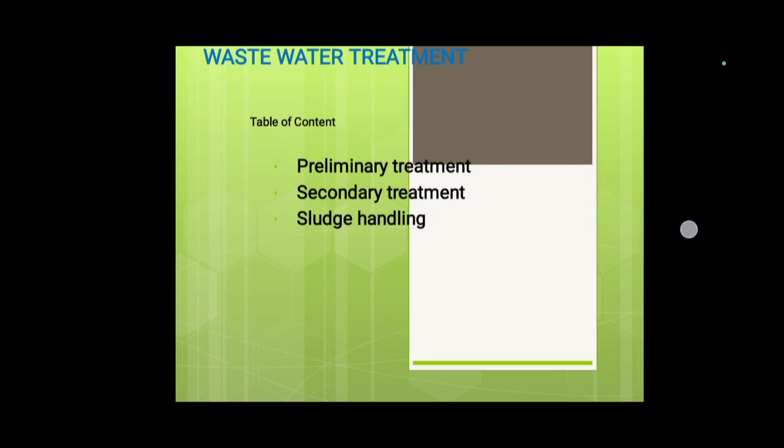First of all, I'm going to discuss preliminary treatment of water. The purpose of preliminary treatment is to protect plant equipment by removing those materials that could cause clogs, jams, or excessive wear to plant machineries. Removal of various materials at the beginning of the treatment process saves valuable space within the treatment plant.

Preliminary treatment processes may include screening method, shredding method, grit removal, pre-aeration, chemical addition, flow measurement, and flow equalization. In the preliminary treatment, first of all, we'll do the screening method. Now in the screening method, floating impurities from the water can be removed. After screening, we send the water for further process.

In the further process, we allow the water undisturbed to remove the small particles, solid particles from the water with the help of force of gravity. That process is known as sedimentation process. For the faster sedimentation, we add some of the chemicals that are known as coagulating agents like aluminum sulfate and sodium aluminate to make faster sedimentation process. In the complete process, flow measurement and the flow equalization is very much necessary.

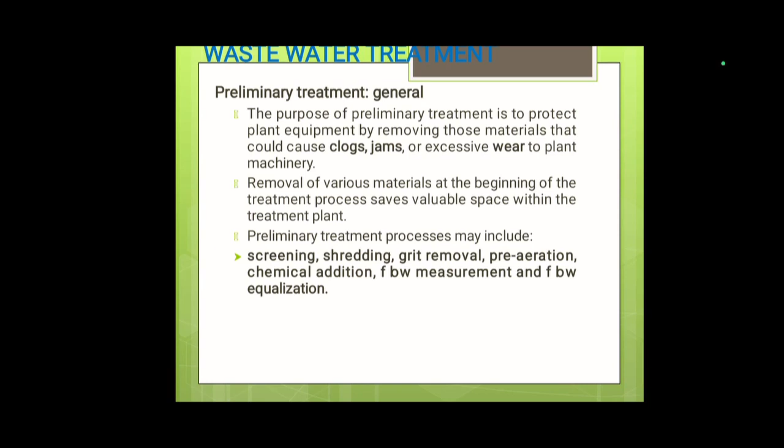In primary sedimentation, wastewater enters in a settling tank or a basin. Solids that are heavier than water settle to the bottom, while solids that are lighter than water float on the top. Settled solids are removed as sludge and floating solids are removed as a scum. The complete solid materials are distributed at the bottom and from the top.

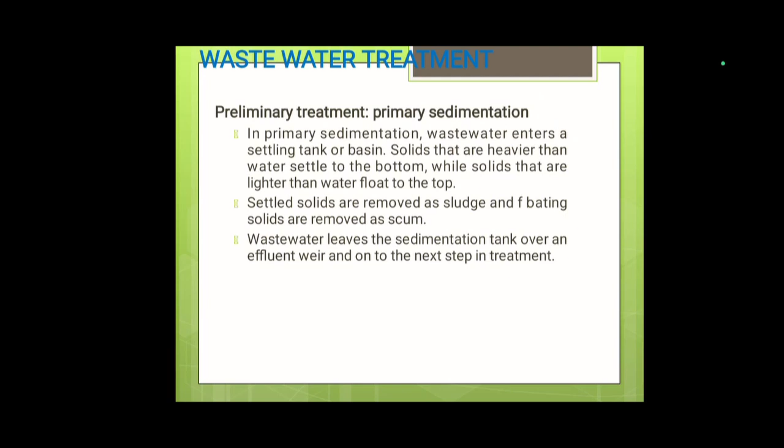The solids which are lighter than water float on the surface of water. So as a scum we can remove them, and rest of the solid materials settled at the bottom due to force of gravity can be removed as a sludge. Wastewater leaves the sedimentation tank over an effluent weir and on to the next step in the treatment. Once sedimentation is done, the water is sent for the next step for the primary treatment. In this sedimentation process, most of the solid impurities and visible impurities are removed.

Clarifiers used may be rectangular or circular. In rectangular clarifier, wastewater flows from one end to other and settled sludge is moved to hopper at one end, either by flights set on parallel chains or by single bottom scraper on the travelling bridge. Floating material, mostly grease and oil, is collected by surface skimmer. In circular tanks, the wastewater usually enters at the middle and flows outward. Settled sludge is pushed to a hopper in the middle of the tank bottom and surface skimmer removes floating material.

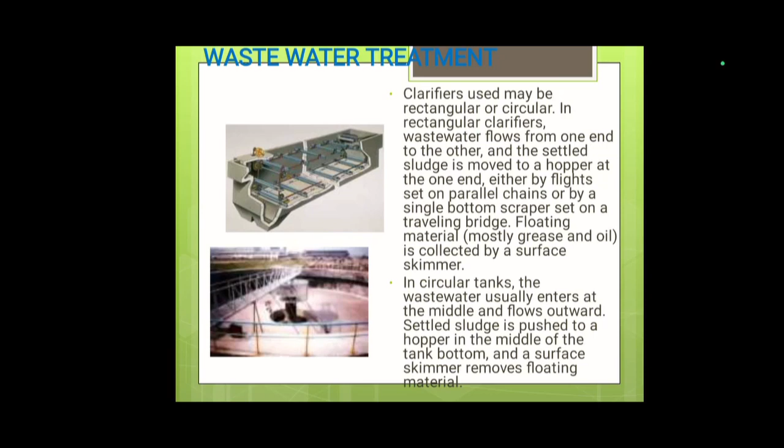As we can see both the diagrams for the circular clarifiers and the rectangular clarifiers. In both the processes, we can remove the solid impurity as floating solid impurities and settled solid impurities. Floating solid impurities, as we have already discussed, are known as scum, and the settled down solid impurities are known as sludge, that is removed from the bottom of the clarifiers. So there are some different types of clarifiers that can be used, as you can see in the diagram. Different types of clarifier are distinguished by the wastewater flow direction and evacuating sludge system. So there are rectangular and circular clarifiers as we can see in the diagram.

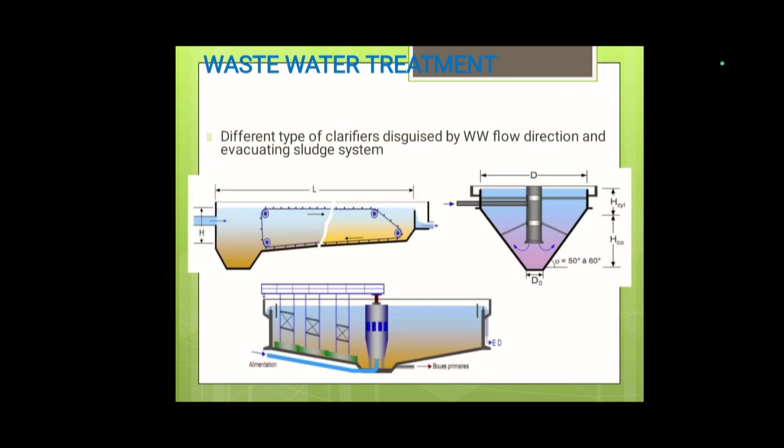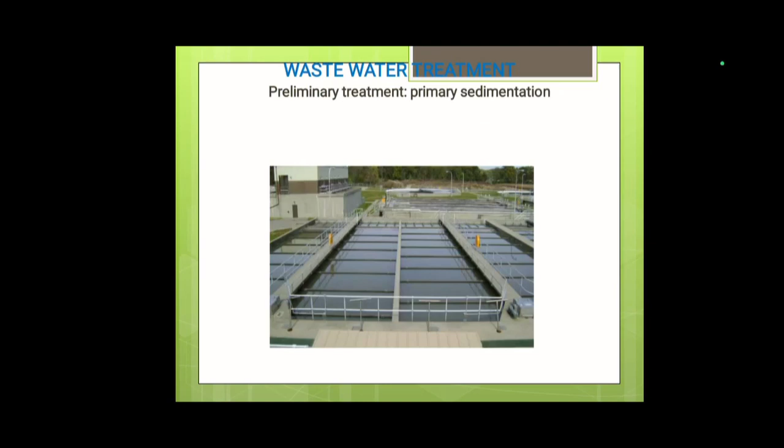Now this is a sedimentation process. As we can clearly see, the water is kept undisturbed in a tank so that whatever solid impurities present inside the water are allowed to settle down with the force of gravity. Here all solid impurities are allowed to settle down and gradually supernatant water is removed with the help of pipes. This is known as primary sedimentation process.

After primary treatment, we treat the water in the secondary treatment process. The main purpose of secondary treatment is to provide BOD removal beyond that achievable by primary treatment. There are some impurities which cannot be removed with the help of primary treatment, so we have to treat the water with the secondary process. Here, the treatment is to provide biological oxygen demand removal beyond what is achieved by the primary treatment.

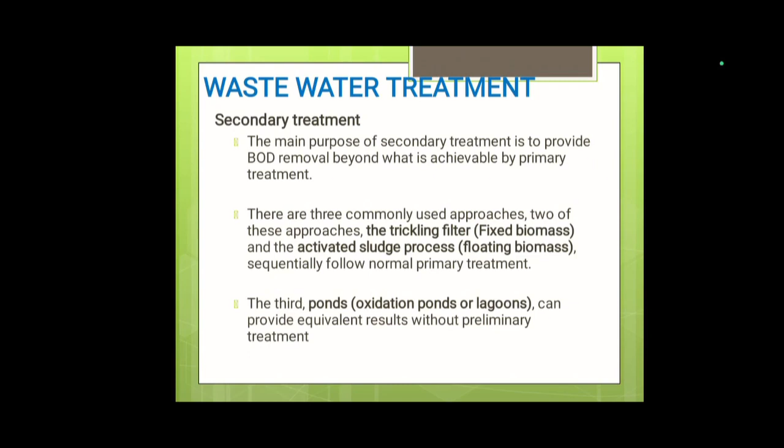There are three commonly used approaches. Two of these approaches, the trickling filters, which is also known as fixed biomass, where we fix the biomass inside the tank, and the activated sludge process, which is also known as floating biomass, sequentially follow normal primary treatment. The third process, known as pond process, also known as oxidation ponds or lagoons, can provide equivalent results without the preliminary treatment. So let us discuss these secondary treatments. We are going to discuss fixed biomass process and activated sludge process in the secondary treatment.

Here we are going to discuss the trickling filters. Trickling filters are tanks filled with solid media. The solid media are plastics or stones, over which the wastewater is trickled. A biofilm grows on media and metabolizes the organics in the wastewater using natural or forced draft. The organics which are present inside the water must be metabolized with the help of biofilm. So these filters allow all these organics present in wastewater to metabolize. In other words, this biofilm provides a platform to metabolize the organics in the wastewater.

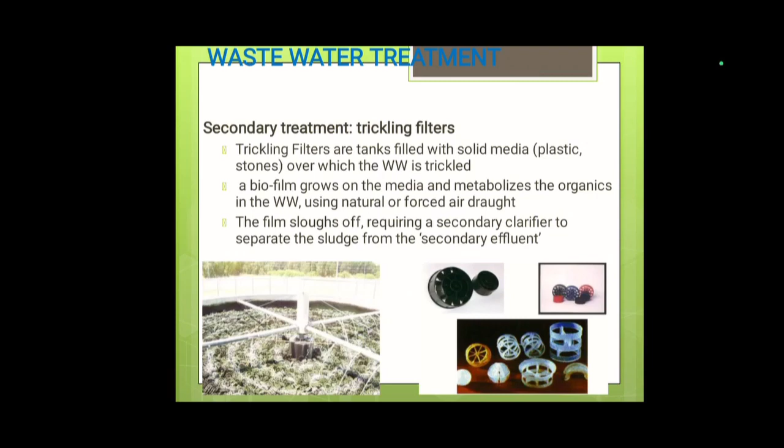The film sloughs off, requiring a secondary clarifier to separate the sludge from the secondary effluent. Here, sludge is separated in the secondary clarifier. As you can see in the diagram, a clearer picture can be seen of this trickling filter. Here, the sludge treatment or secondary treatment can be shown very clearly with the help of trickling filters.

As we can see in this diagram, the feed pipe is present at the center of the trickling filter. The wastewater is fed from the center and it goes above to the trickling filter, and then it's sent inside the tank of the trickling filter with the help of sprayers. Sprayers are used for the uniform distribution of wastewater on the solid film.

Gradually, the wastewater reacts with this stone film or this wastewater film, and it metabolizes, and at the bottom we get the clarified water or clear water, which can be sent to a different tank with the help of the outlet.

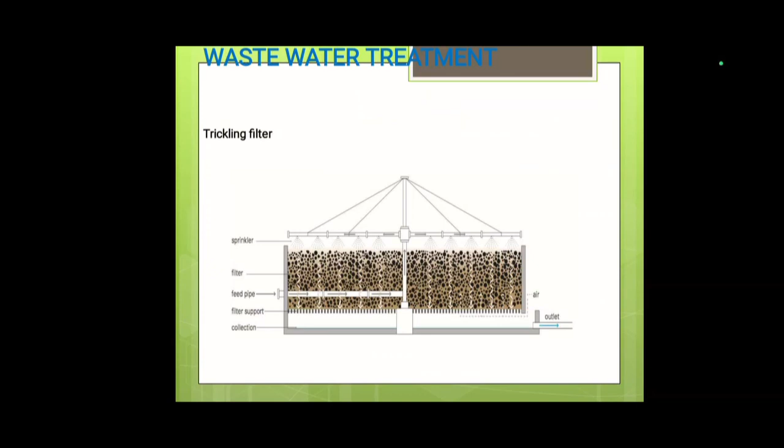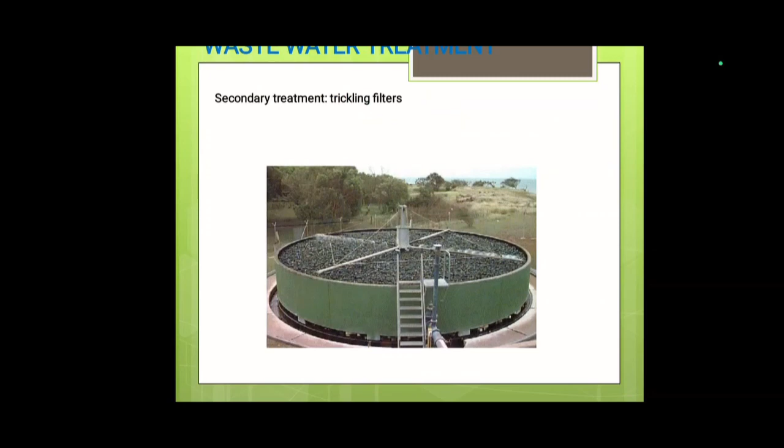Now let us discuss the activated sludge process. The basic components of an activated sludge sewage treatment system include an aeration tank and secondary clarifier. Primary effluent is mixed with settled solids, that is biomass, recycled from the secondary clarifier and is then introduced into the aeration tank. Air is supplied continuously into the mixture.

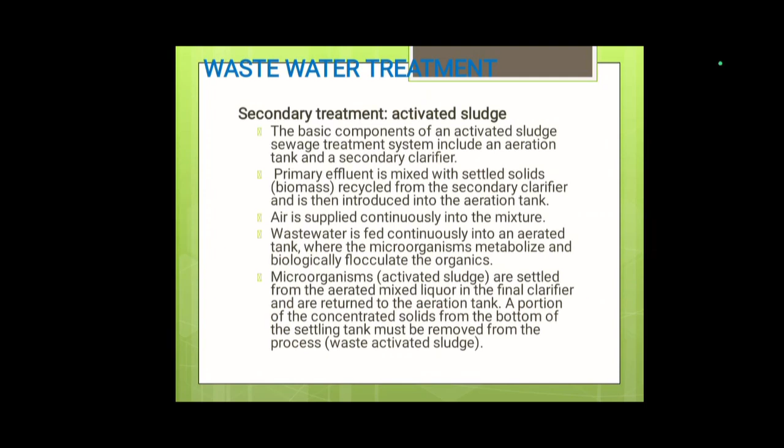Wastewater is fed continuously into an aerated tank where the microorganisms metabolize and biologically flocculate the organics. Microorganisms, that is activated sludge, are settled from the aerated mixed liquor in the final clarifier and are returned to the aeration tank. A portion of concentrated solids from the bottom of the settling tank must be removed from the process, that is waste activated sludge.

and clear water comes as a supernatant liquid in the second tank, and that is considered to be effluent, which is sent for purification. And from the bottom of the second tank, we remove the sludge, which is again sent to the first tank, so that we can use that as activated sludge. So in this way, the complete process of activated sludge is carried out.

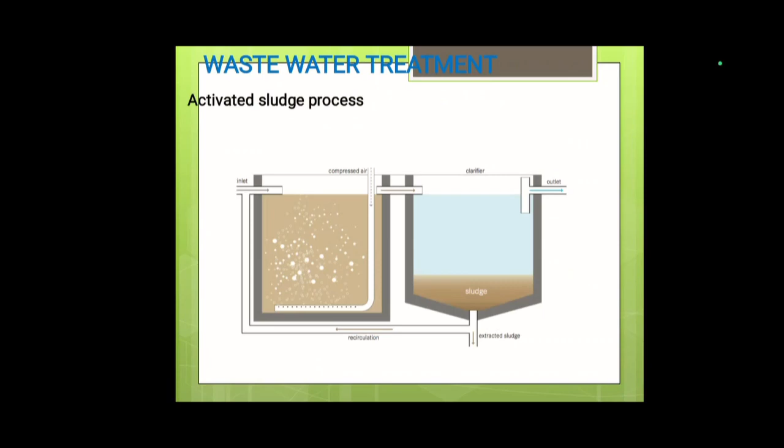Another secondary treatment is the biogas reactor. A biogas reactor or anaerobic digester is an anaerobic treatment technology that produces a digested slurry, also known as digestate, that can be used as a fertilizer, and biogas that can be used for energy.

So there are two advantages of using this biogas reactor. We get the digested slurry, which can be used as an organic fertilizer in the agriculture field. And biogas is used as an alternative source of energy, and biogas is considered to be a renewable source of energy. A biogas reactor is an airtight chamber that facilitates the anaerobic degradation of black water, sludge and biodegradable waste.

So this process can be applied for different kinds of wastewater like black water, which is generated from the gutters and different wastewater outlets, then sludge and biodegradable waste. This technology can be applied at the household level, in small neighborhoods, or for stabilization of sludge at larger wastewater treatment plants. It is best used where regular feeding is possible.

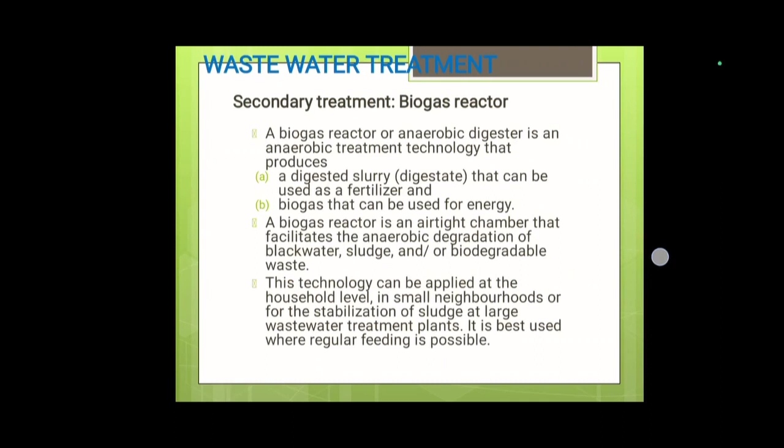So where big messes are used, where lots of food waste is generated, this biogas reactor can be implemented, and we can generate bioenergy with the help of waste food, and it can be used for cooking also. So there are pros and cons for the biogas reactor. Let us discuss these pros and cons.

Generation of renewable energy. We can generate energy with the help of the bioreactor, and we can continuously generate the energy. That's why it is known as renewable energy. Small land area required. Most of the structure can be built underground. So a very small area is required; no large area is required.

So it is efficient and it is a reliable method, and structure can be built underground also. So it is a very human friendly process. No electric energy is required. The complete process required no electric energy. The conservation of nutrients: this is the most important point we can have, we can conserve the nutrients.

Long service life, low operating cost, requires expert design and skilled construction, incomplete pathogen removal, the digestate might require further treatment. So there might be possibility that the complete digestion process could not happen. So incomplete pathogen removal can be sent for next treatment process or for further fermentation process. So these are some of the pros and cons for the biogas reactor.

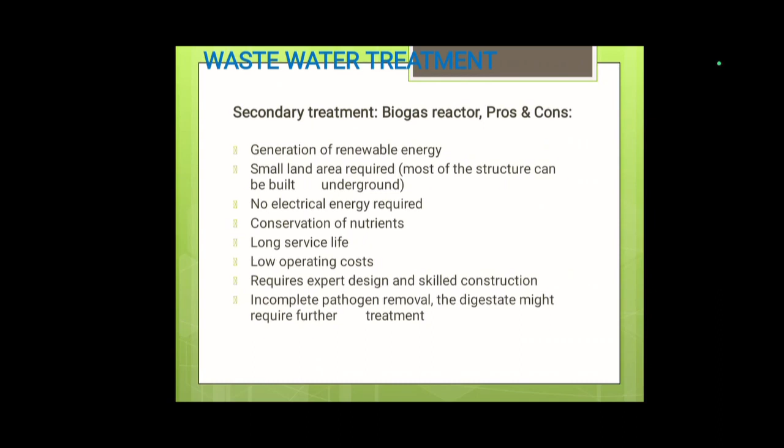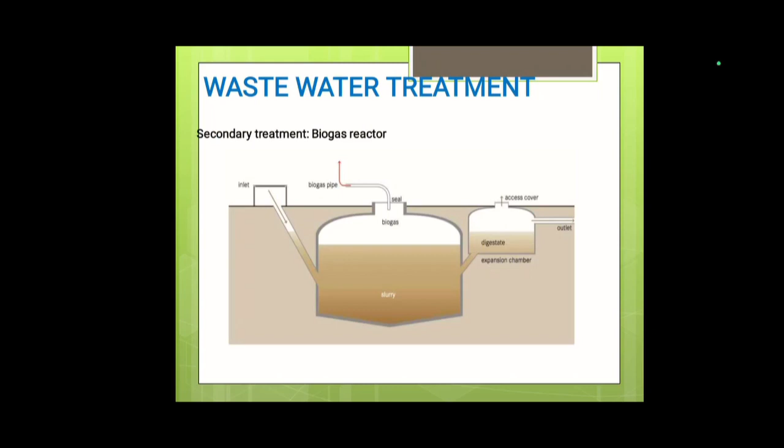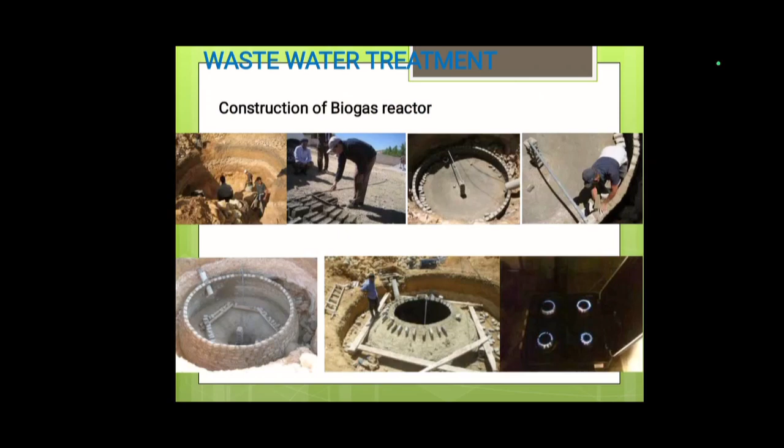After the complete treatment, whatever sludge is produced, we have to treat it or handle that sludge properly. We cannot throw it in the environment as it is. So we are going to discuss the sludge handling process in brief. The ultimate purpose is the conversion of wastewater sludge into a form that can be handled economically and disposed of without damaging the environment or creating nuisance conditions.

Sludge treatment accounts for more than half of the total cost in the typical secondary treatment plant. Sludge treatment methods are generally divided into three major categories. First one is thickening, then stabilization including inactivation of pathogenic organisms, and then dewatering. Now the sludge obtained from the wastewater has different percentages of water. So most importantly, we have to thicken that sludge, meaning we have to remove most of the water from that sludge.

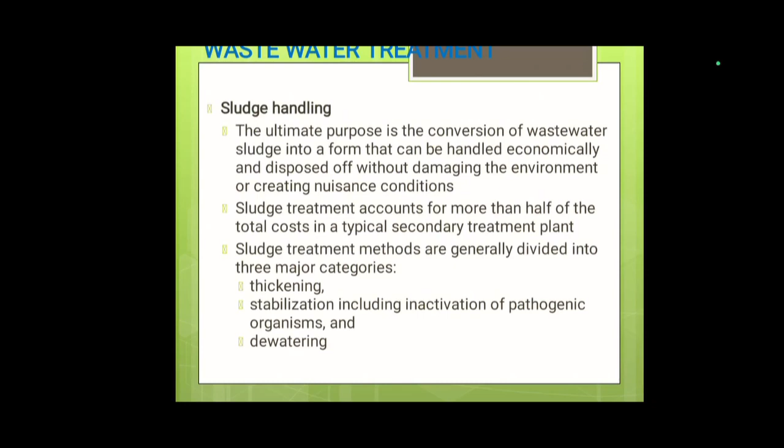The second is it might happen that there may be some viruses, bacteria or pathogens present inside that sludge. So we have to stabilize that sludge, and we have to treat all the pathogenic organisms present inside that sludge so that it cannot create harm if it goes into the environment. And the last one, we have to remove the water from the sludge so that we can use it as a compost or as a fertilizer for the agricultural field.

So a ratio of 1:2 to 1:3 between dewatered sludge, that is UDDT matter, and organic waste is mixed. Mixed material is piled into long heaps, that is windrows, and left to decompose for approximately 3 months. Windrows are turned periodically to provide oxygen and ensure that all parts of the pile are subjected to the same heat treatment. Piles should be insulated with compost or soil to promote an even distribution of heat. Careful planning and design is required to avoid failure. So this is about the sludge treatment.

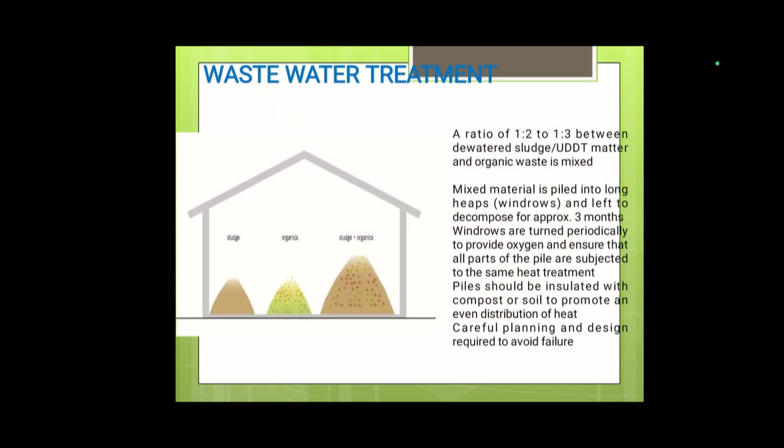So these are some contents from the wastewater treatment. In this topic we have discussed the primary treatment, the different primary treatments like screening method, sedimentation process, coagulation process. Then we discussed the secondary process, in which we discussed the activated sludge process, then the biogas reactor, biogas creation method, and finally we discussed the sludge treatment, whatever sludge is produced from the wastewater.